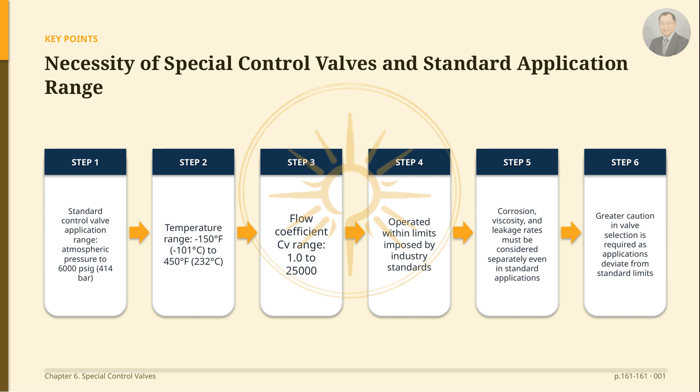However, even within these standard applications, several factors such as fluid corrosion, viscosity, and allowable leakage rates must be considered. And the further an application falls outside these standard limits, the more careful judgment is required in valve selection.

I would like to introduce high-capacity control valves. Generally, globe-style valves larger than 12 inches, ball valves over 24 inches, and high-performance butterfly valves larger than 48 inches fall into the special valve category.

When valve size increases arithmetically, static pressure loads at shutoff increase geometrically. As a result, shaft strength, bearing loads, unbalanced forces, and the required actuator thrust all become more significant as the valve size increases. Therefore, for large valves, the maximum allowable pressure drop is usually reduced to keep design and actuator requirements within reasonable limits.

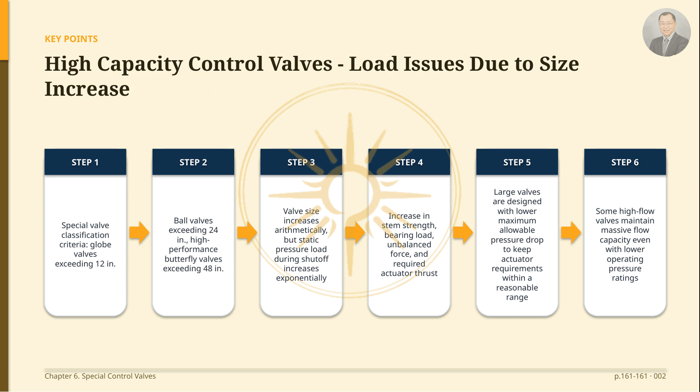However, even with these lowered working pressure ratings, the flow capacity of some large flow valves remains tremendous. In large flow installations, noise levels must be carefully considered because sound pressure levels increase in direct proportion to flow magnitude. To keep valve-originated noise within tolerable limits, large cast or fabricated valve body designs have been developed, as shown in Figure 6.1.

These bodies normally use a cage-style construction, incorporating unusually long plug travel, a great number of small flow openings through the cage wall, and an expanded outlet line connection. This minimizes noise output and reduces fluid velocity.

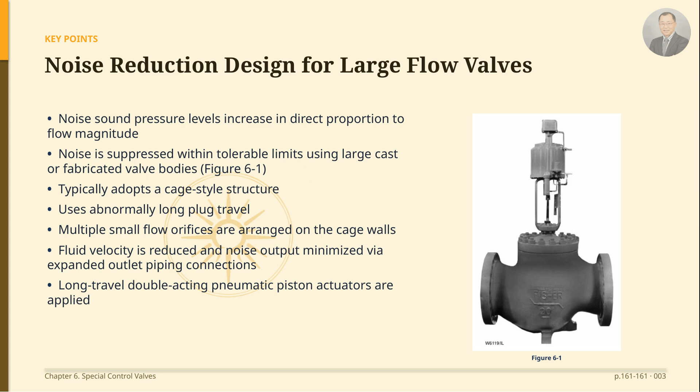Naturally, actuator requirements become more severe, so long-stroke, double-acting pneumatic pistons are typically specified for large flow applications. This shows the appearance and structure of a large flow valve body optimized for noise attenuation service.

The physical size and weight of large valves and actuator components complicate installation and maintenance procedures. Heavy-duty hoists are required to install the valve body assembly into the pipeline, or to remove and replace major trim parts. Additionally, maintenance personnel must closely follow the manufacturer's instruction manuals to minimize the risk of injury.

Next, I will introduce low-flow control valves. There are many applications in laboratories and pilot plants, as well as in general processing industries, where extremely low flow rates must be controlled. These are typically handled in one of two ways.

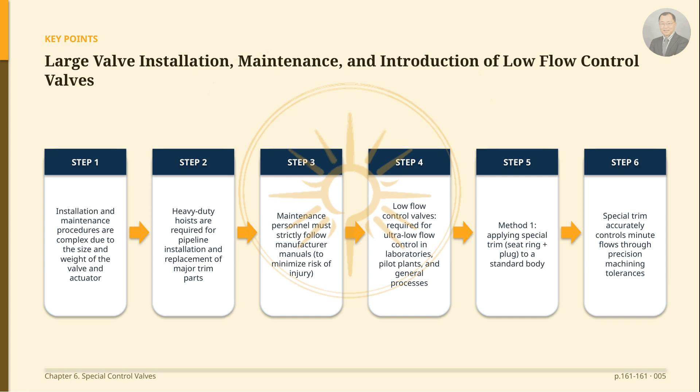The first is applying special trims to standard control valve bodies. These special trims consist of a seat ring and plug designed and machined to very close tolerances to allow accurate control of very small flows. These types of special trim constructions can often handle CV values as low as 0.03.

Using special trims in standard control valves is economical because it reduces the need for spare parts inventory for special valves and actuators. This approach also makes future flow expansions easy, as you only need to replace the trim components within the standard control valve body.

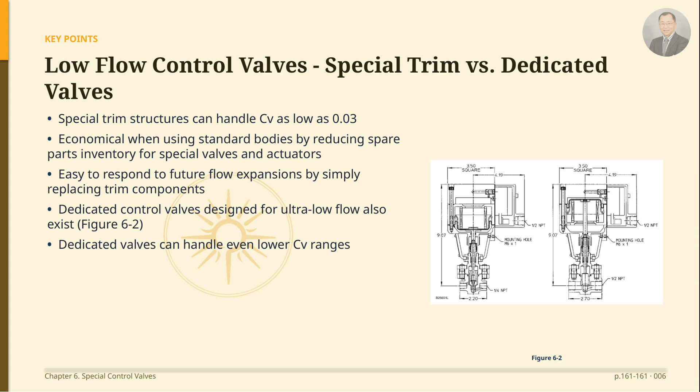Meanwhile, as shown in Figure 6.2, control valves specifically designed for very low flow rates also handle these applications. These dedicated valves can handle even lower CV ranges. This is a special valve designed to enable precise control even within very low flow ranges.

Next, we turn to high-temperature and cryogenic valves. The specialty control valves mentioned earlier handle very low flow rates, down to a CV of 0.000001, or 1 millionth. These specialty control valves are compact and lightweight because they are often used in laboratory environments where very light schedule piping and tubing are used.

These valves are specially designed for the accurate control of very low-flowing liquid or gaseous fluid applications. Next, I will introduce high-temperature control valves.

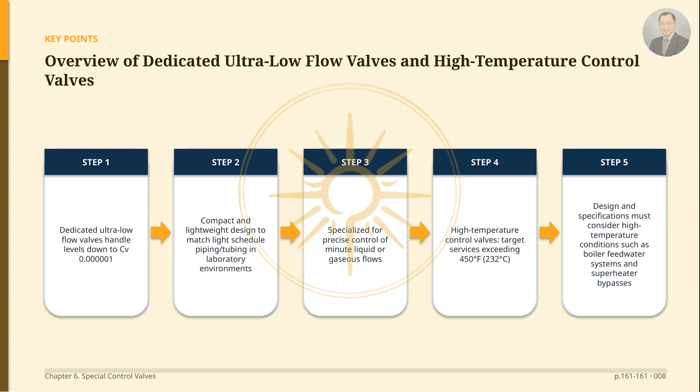Control valves used at temperatures exceeding 450 degrees Fahrenheit (232 degrees Celsius) must be designed and specified with those temperature conditions in mind. In high-temperature environments, such as boiler feedwater systems or superheater bypass systems, standard materials may not be sufficient. I would like to discuss material selection for high-temperature control valves.

For services exceeding 450 degrees Fahrenheit (232 degrees Celsius), the valve must be designed and specified from the start based on the temperature conditions. Typical applications include areas subject to high temperatures, such as boiler feedwater systems and superheater bypass systems. At these temperatures, the materials used in standard control valves are inadequate. Plastics, elastomers, and standard gaskets cannot withstand these conditions and must be replaced with more durable materials.

Metal-to-metal seating is always used for the seat, and semi-metallic or laminated flexible graphite materials are used for packing. For gaskets, a combination of spiral wound stainless steel and flexible graphite is required.

Regarding the valve body material, chrome-moly steel castings are frequently used for temperatures exceeding 1000 degrees Fahrenheit (538 degrees Celsius). ASTM A217 grade WC9 is used up to 1100 degrees Fahrenheit (593 degrees Celsius), and up to 1500 degrees Fahrenheit (816 degrees Celsius), ASTM A351 grade CF8M, or Type 316 stainless steel, is typically selected.

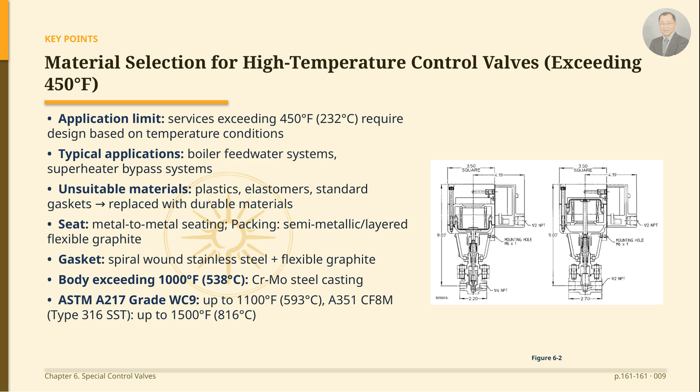I will now cover valve body materials for ultra-high temperatures and move on to cryogenic service. For the range between 1000 degrees Fahrenheit (538 degrees Celsius) and 1500 degrees Fahrenheit (816 degrees Celsius), the carbon content must be managed at the upper end of the range, between 0.04 and 0.08%.

In higher temperature regions, 9% Cr, 1% Mo, and vanadium materials are used. ASTM A217 grade C12A castings and ASTM A182 grade F91 forgings are used at temperatures up to 1200 degrees Fahrenheit (650 degrees Celsius). Extension bonnets protect packing box parts from extremely high temperatures.

Typical trim materials include cobalt-based alloy 6, type 316 with alloy 6 hard-facing, and nitride type 422 stainless steel.

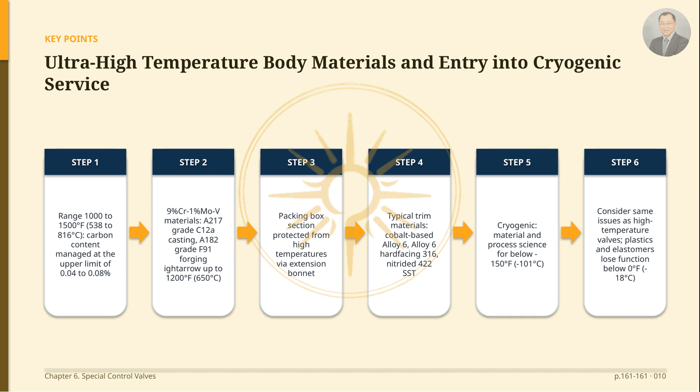Now, let's move on to cryogenic service. Cryogenics is the science dealing with materials and processes at temperatures below minus 150 degrees Fahrenheit (minus 101 degrees Celsius). In cryogenic control valves, issues quite similar to those of high-temperature valves must be considered. Plastic and elastomeric components often cease to function properly at temperatures below 0 degrees Fahrenheit (minus 18 degrees Celsius).

I will now discuss the issues that arise with packing and plug seals in cryogenic regions. In these low-temperature ranges, components such as packing and plug seals require special consideration. In the case of plug seals, standard soft seals become very hard and lose flexibility as the temperature drops. Consequently, they fail to provide the shut-off performance expected from a soft seat. In other words, the sealing effect intended for a soft seat is lost.

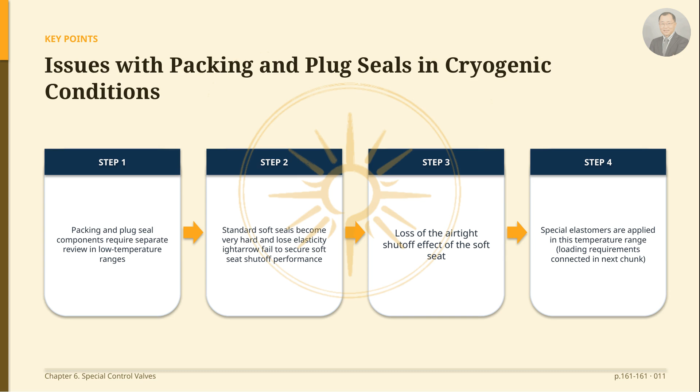To solve this problem, special elastomers have been applied in this temperature range, although separate loading is required to achieve a tight seal. This loading will be covered in the following explanation. I will now explain how to prevent icing using extension bonnets. The special elastomers mentioned earlier require separate loading, or pressurization, to achieve a tight seal.

Packing becomes an issue in cryogenic applications because of the frost that forms on the valves. Moisture from the atmosphere condenses on colder surfaces, and if the surface temperature is below freezing, that moisture freezes into a layer of frost. When this frost and ice form on the bonnet and stem areas of control valves, and the actuator strokes the stem, the frost layer on the stem is drawn into the packing, tearing it and resulting in a loss of seal.

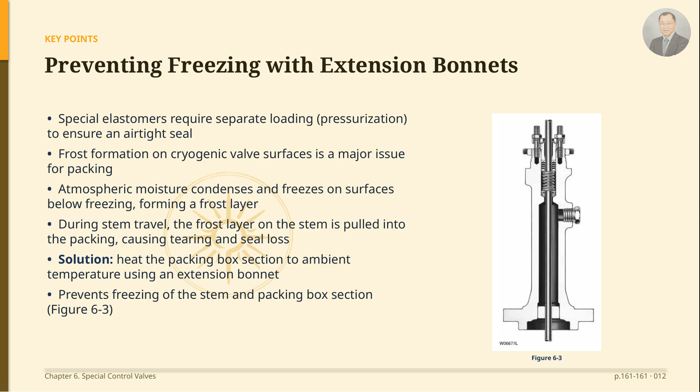The solution is to use extension bonnets. As shown in Figure 6.3, using an extension bonnet keeps the packing box area of the control valve warmed by ambient temperatures, thereby preventing frost from forming on the stem and packing box areas. This is a typical extension bonnet designed for thermal insulation or to secure installation space.

I would like to introduce the determination of extension bonnet length and customized characteristic trims. The length of the extension bonnet is determined by the application temperature and insulation requirements. The colder the application, the longer the extension bonnet required.

For cryogenic applications, the construction materials are generally CF8M for the body and bonnet and 300 series stainless steel for the trim. In flashing applications, hard facing might be required to combat erosion. Next, I will discuss customized characteristic trims.

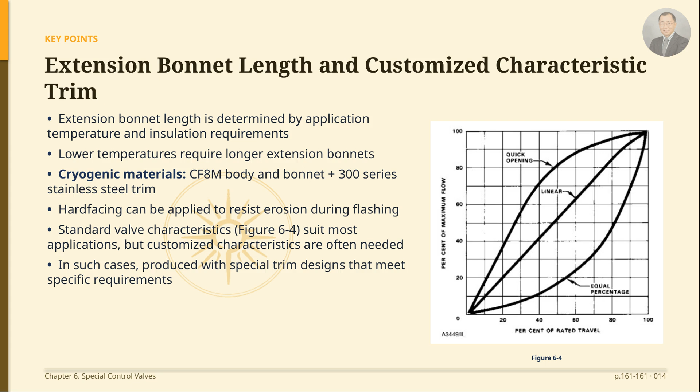The valve characteristics used in standard control valves, as shown in Figure 6.4, meet the requirements of most applications. However, custom characteristics are often needed for specific applications. In these instances, special trim designs can be manufactured to meet these requirements.

Next, we turn to valve characteristics. This is the inherent characteristic graph, which shows the change in flow rate according to the valve travel. I would like to introduce how to implement valve characteristics using contoured plugs and cages, as well as noise abatement.

In the case of contoured plugs, the design of the plug tip can be modified so that the unobstructed flow area changes in size as the plug moves through its travel range. This allows for the generation of a specific flow characteristic.

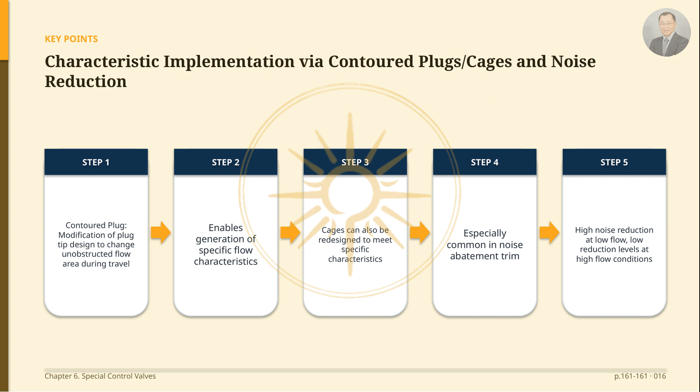Likewise, cages can be redesigned to meet specific characteristics. This is especially common in noise abatement type trims, because in these trims, a high level of noise abatement may be required at low flow rates, but much lower abatement levels are required for higher flow rate conditions.

In the U.S., since 1970, manufacturers and suppliers of nuclear power plant components have been subject to the requirements of Appendix B of 10 CFR Part 50. The official name of this regulation is Quality Assurance Criteria for Nuclear Power Plants and Fuel Reprocessing Plants. The agency that enforces this regulation is the U.S. Nuclear Regulatory Commission, or NRC.

An important point here is that the ultimate responsibility for proving compliance with Appendix B rests with the plant owner. Since the owner cannot manufacture everything themselves, they rely on documented evidence provided by various component manufacturers. This evidence must show that the components were manufactured, inspected, and tested by proven techniques, performed by qualified personnel according to documented procedures.

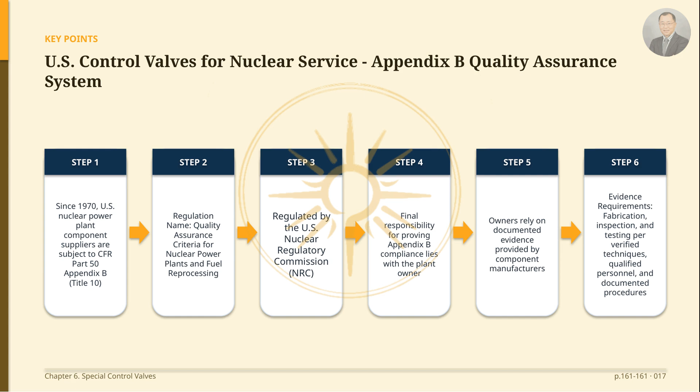The medium that translates the federal regulation requirements mentioned earlier into actual valve specifications is the ASME Boiler and Pressure Vessel Code. Most nuclear power plant components are specified in accordance with Section 3 of this code, titled Nuclear Power Plant Components. Section 3 is applied to align with the requirements of the Code of Federal Regulations.

All aspects of the manufacturing process must be documented in a quality control manual, and ASME must audit and certify this manual before the actual manufacture of the components. All subsequent manufacturing materials and operations are checked by an authorized inspector.

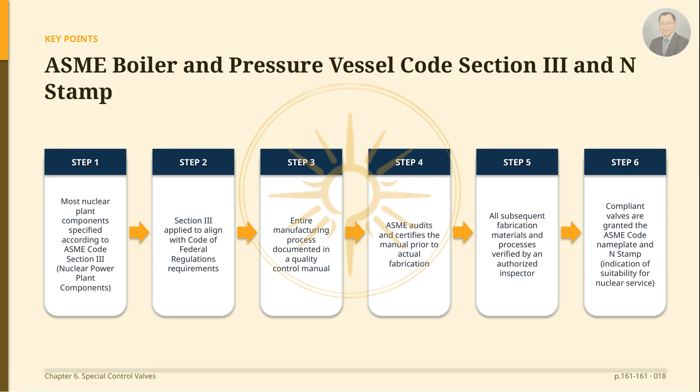All valves manufactured in accordance with Section 3 requirements receive an ASME code nameplate and an N stamp, which is the symbol of acceptability for service in nuclear power plant applications. In practice, it is very important to distinguish what Section 3 covers and what it does not.

First, the scope of non-application. It does not apply to parts not associated with the pressure retaining function, nor to actuators and accessories unless they are pressure retaining parts. It also does not apply to the deterioration of valve components due to radiation, corrosion, erosion, seismic or environmental qualifications, or to cleaning, painting, or packaging requirements.

However, these excluded items are usually specified separately in customer specifications. Conversely, the scope of application includes materials used for pressure-retaining parts, design criteria, fabrication procedures, non-destructive test procedures for pressure-retaining parts, hydrostatic testing, and marking and stamping procedures.

Finally, Section 3 is revised by semi-annual addenda, which may be used after the date of issue and become mandatory 6 months after the date of issue.

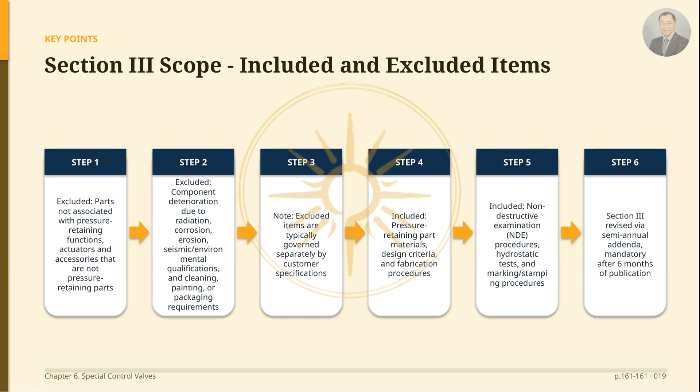Next, we turn to SSC and NACE standards. Now, I would like to introduce sulfide stress cracking, which is a problem in harsh environments containing hydrogen sulfide, so-called sour service. NACE International is a technical society concerned with corrosion and corrosion-related issues.

NACE manages many standards, but by far the most influential and well-known is MR0175. The former name of this standard was Sulfide Stress Cracking Resistant Metallic Materials for Oilfield Equipment. MR0175 was issued in 1975 to provide guidelines for the selection of materials that are resistant to failure in hydrogen sulfide-containing oil and gas production environments.

Because this standard has been so widely referenced, the term NACE has become nearly synonymous with MR0175 throughout the process industry.

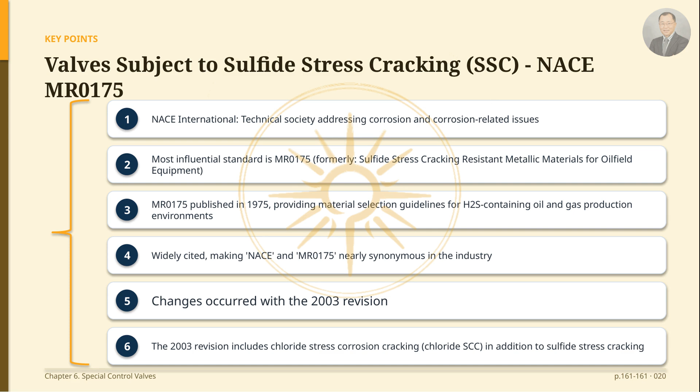However, the situation changed in 2003. In the 2003 revision, the standard was significantly modified to cover chloride stress corrosion cracking in addition to sulfide stress cracking. As a result, the standard system split into two branches. First, in late 2003, MR0175 was reformatted and released as a joint NACE/ISO document.

This integrated document is NACE MR0175/ISO 15156, and it covers materials for use in H2S containing environments in oil and gas production within the petroleum and natural gas industries. Meanwhile, in April 2003, NACE also released a separate new standard, MR0103. The title of this standard is Materials Resistant to Sulfide Stress Cracking in Corrosive Petroleum Refining Environments.

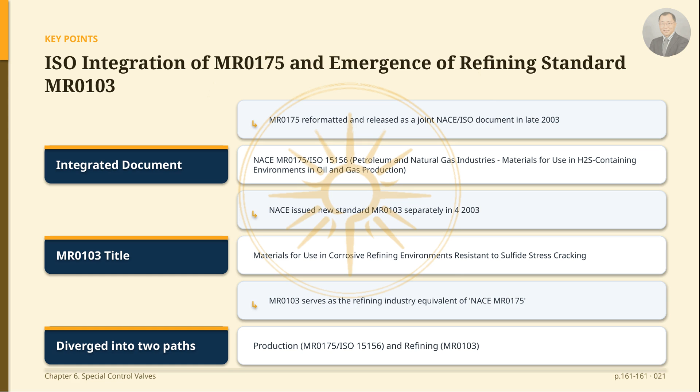Simply put, you can think of MR0103 as the NACE MR0175 for the refining industry. Thus, the standards diverged into two streams: MR0175/ISO 15156 for the production sector, and MR0103 for the refining sector. I would like to introduce the nature of MR0103, the refining standard, and the extent to which these standards are legally mandated.

MR0103 only addresses sulfide stress cracking, and in that respect, it is similar in many ways to the pre-2003 revisions of MR0175. The application of MR0103 in the refining industry is steadily increasing.

Here, it is necessary to distinguish the level of mandate. In some states and regions in the USA, compliance with certain revisions of NACE MR0175 or MR0175/ISO 15156 is mandated by statute. On the other hand, at this time, MR0103 is not legally mandated by any governing bodies. Finally, the following explanation is based on the content and requirements of the pre-2003 MR0175, but it cannot be presented in as much detail as the actual standard, nor does it guarantee the suitability of specific materials.

Therefore, I strongly recommend referring to the actual standard text before selecting control valves for sour service.

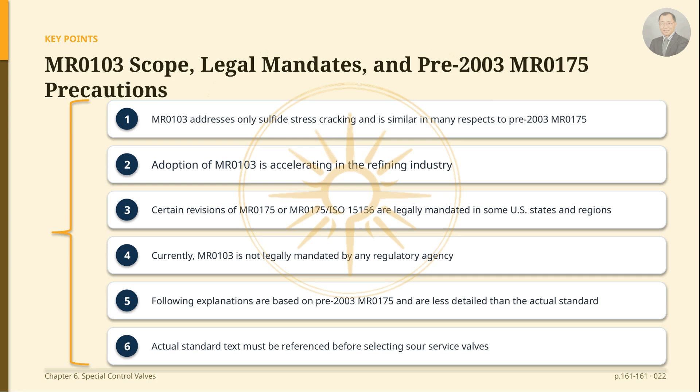I will now explain how to select metallic materials that resist sulfide stress cracking, or SSC. Most ferrous metals become susceptible to sulfide stress cracking when hardened by heat treatment or cold work. Conversely, many ferrous metals can actually improve their resistance through proper heat treatment. Carbon and low-alloy steels must be properly heat-treated, and a maximum hardness limit of 22 HRC applies.

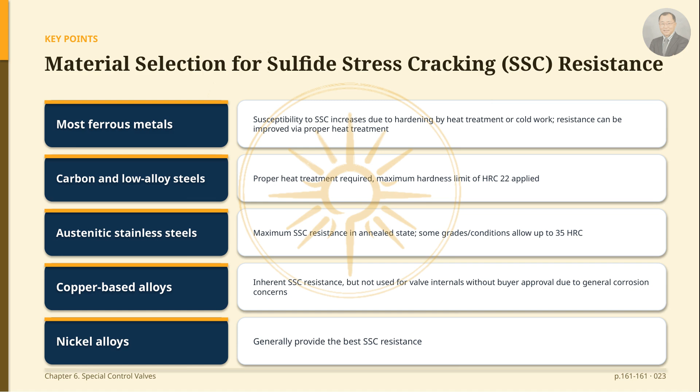Austenitic stainless steels have the best resistance in annealed condition, and in some specific grades and conditions, up to 35 HRC is acceptable. Copper-based alloys are inherently resistant, but due to concerns about general corrosion, they are generally not used in critical parts of a valve without the purchaser's approval. Nickel alloys generally provide the best resistance to sulfide stress cracking.

Next, I will introduce the sulfide stress cracking requirements regarding nickel alloys, plating, welding, and identification marking. Some precipitation hardenable nickel alloys can be used up to 40 HRC in applications requiring high strength or hardness. Plating such as chromium or nickel does not protect against sulfide stress cracking. Therefore, while its use is allowed in sour applications for wear resistance, it cannot be used to protect a non-resistant base material from SSC.

Weld repairs and fabrication welds on carbon and low-alloy steels must be properly processed to ensure that the base metal, the heat-affected zone (HAZ), and the weld deposit all meet the maximum hardness requirement of 22 HRC or less. Post-weld heat treatment, or PWHT, is mandatory for alloy steels and is generally applied to carbon steels as well. For identification marking, conventional stamping is permissible in low-stress areas,

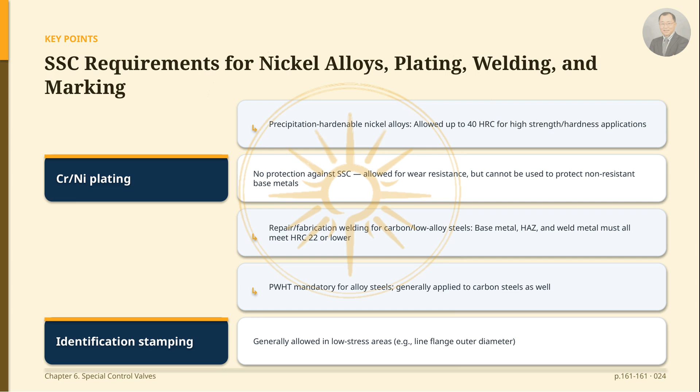such as on the outside diameter of line flanges. I previously mentioned low-stress areas like the outer diameter of line flanges, but in other areas, low-stress identification stamping must be used. The standard precludes using ASTM A193 grade B7 bolting for applications that are considered exposed.

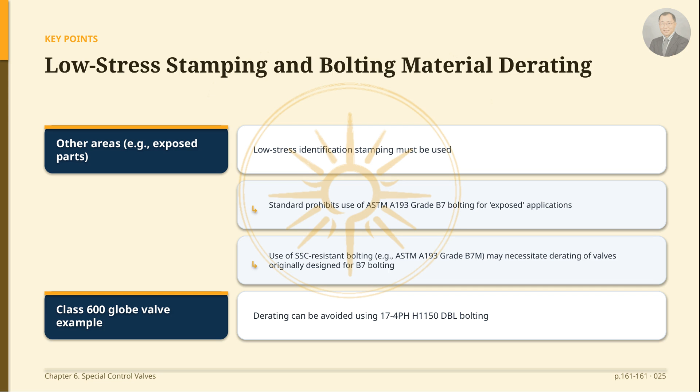Therefore, SSC-resistant bolting materials, such as ASTM A193 grade B7M, are used, but in this case, valves originally designed for B7 bolting may require derating. For example, in a Class 600 globe valve, 17-4PH H1150 DBL bolting can be used to avoid derating.

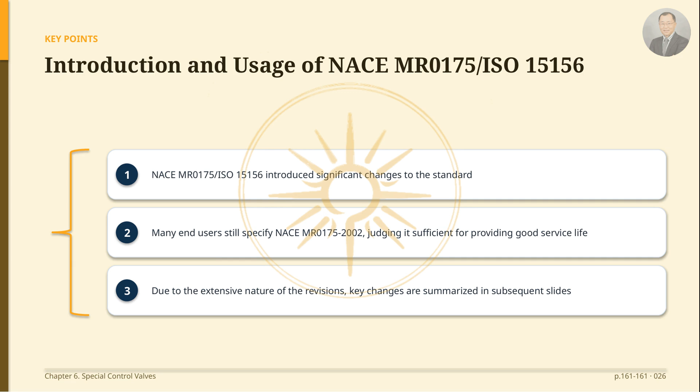Now, I would like to introduce the introduction and current usage of the NACE MR0175/ISO 15156 standard. This integrated standard brought significant changes to the previous standard. However, many end users continue to specify NACE MR0175-2002, as they feel this version is sufficient to provide a good service life. I will summarize the most significant changes of the new integrated standard in the following sections.

I'll introduce the major changes in MR0175/ISO 15156. First, 17-4PH H1150 DBL bolting, which was previously used for full-rated exposed bolting in a Class 600 globe valve, is no longer allowed.

Second, this revision addresses both sulfide stress cracking and chloride stress corrosion. Prior versions simply listed most materials as acceptable or unacceptable. However, as the scope expanded to cover chloride stress corrosion, the new standard changed to allow all corrosion-resistant alloys within certain limits, referred to as environmental limits or environmental restrictions.

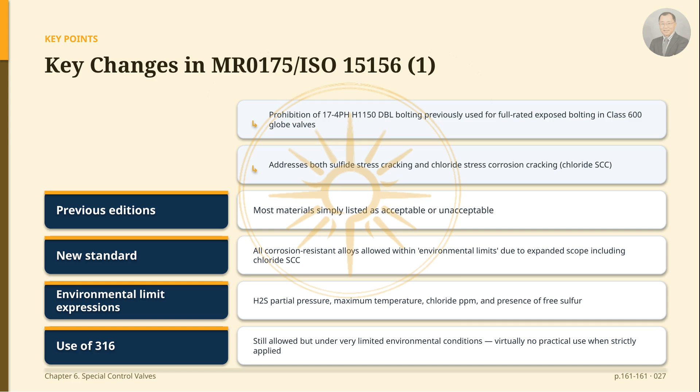These environmental limits are typically expressed in terms of H2S partial pressure, maximum temperature, ppm chlorides, and the presence of free sulfur. Third, the use of 316 material is still allowed, but only under very limited environmental conditions. If strictly followed, this material will find very little use in practice.

Next, I'll discuss the scope of application and the division of responsibility for NACE MR0175 and ISO 15156. This standard applies to petroleum production, drilling, gathering, and flow line equipment, as well as field processing facilities, and is limited to H2S bearing hydrocarbon service. Importantly, it does not apply to refineries, as the refinery environment is covered by a separate standard.

MR0103. The division of responsibility is also clear. The buyer is responsible for specifying the correct materials, and the manufacturer is responsible for ensuring the specified materials meet the metallurgical requirements of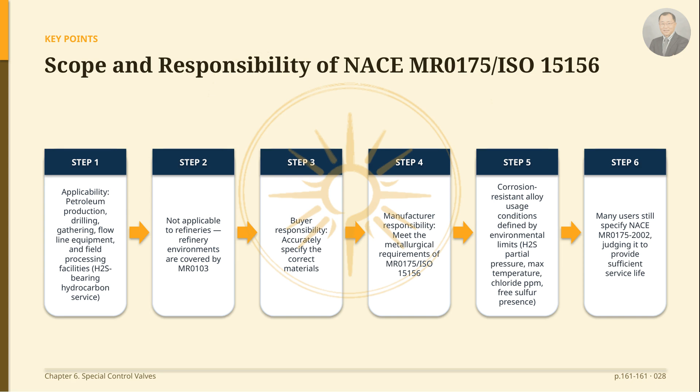MR0175 and ISO 15156. This revision defines the usage conditions for corrosion-resistant alloys through environmental limits, such as H2S partial pressure, maximum temperature, ppm chlorides, and the presence of free sulfur. Meanwhile, many end users still specify the 2002 edition of MR0175, believing that version alone is enough to ensure sufficient service life.

Following this, I'll introduce NACE MR0103, the sulfide stress cracking standard for the refining industry. This standard is similar in many respects to the MR0175 revisions prior to 2003, but there are a few important differences. First, the definition of what constitutes a sour environment, that is, a corrosive environment, is different, as MR0103 uses a refinery-based definition. Also, the responsibility for determining and imposing when the requirements of this standard apply lies with the user. The biggest difference is the scope.

While the 2002 and earlier revisions of MR0175 placed environmental restrictions on some materials, MR0103 deals only with sulfide stress cracking and does not impose environmental limits on any materials. Therefore, materials are categorized as either acceptable or not.

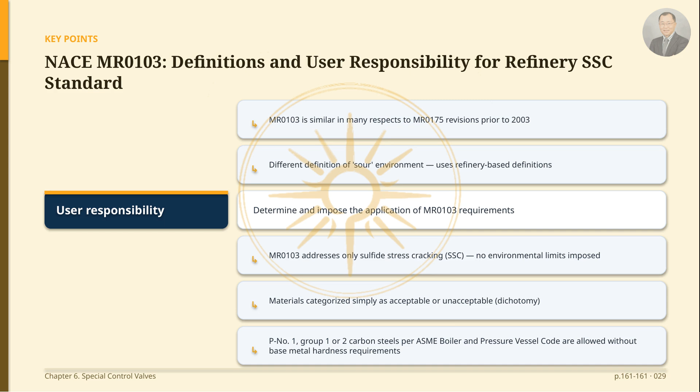Finally, carbon steel-based materials classified as P-No. 1, Group 1 or Group 2 in the ASME boiler and pressure vessel code are acceptable per MR0103 without base metal hardness requirements. Now, I'll introduce the range of carbon steel-based materials to which the NACE

MR0103 standard applies. Carbon steels classified as P-No. 1, Group 1 and 2 in the ASME boiler and pressure vessel code are recognized as satisfying MR0103 without separate base metal hardness requirements. Specifically, P-No. 1, Group 1 and 2 include WCC and LCC castings, A105 forgings, A516 grade 70 plate, and other common carbon steel pressure vessel materials. These materials are representative carbon steels commonly used in refinery environments.

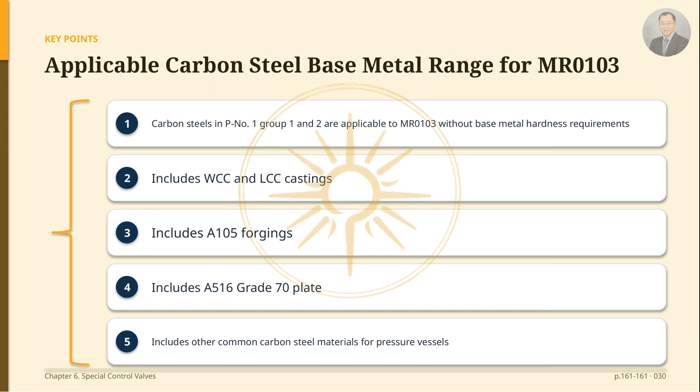Next, I would like to introduce the welding control requirements that MR0103 imposes on carbon steels. MR0103 requires more rigorous welding controls for carbon steels than those in the 2002 edition of MR0175. Specifically, it stipulates that P-No. 1 carbon steels must be welded according to another NACE document called

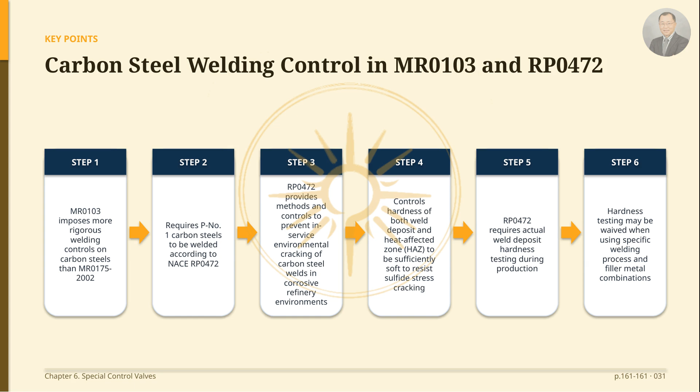RP0472. This RP0472 document contains methods and controls to prevent in-service environmental cracking of carbon steel weldments in corrosive petroleum refining environments. This regulation ensures that both the weld deposit and the heat-affected zone, or HAZ, are soft enough to resist sulfide stress cracking. Additionally, RP0472 requires actual hardness testing of weld deposits during production, although this hardness testing may be waived if certain welding process and filler material combinations are employed.

Now, I will explain how the hardness of the weld heat-affected zone is controlled in the NACE MR0103 standard. The hardness of the heat-affected zone, or HAZ, around the weld can be managed in 2 primary ways. The first is by applying post-weld heat treatment, known as PWHT, and the second is by restricting the chemistry of the base material itself. A representative example of restricting chemical composition is imposing a maximum carbon equivalent, or CE value, below a certain level. The reason for controlling hardness in this way is to prevent stress cracking occurring in corrosion environments.

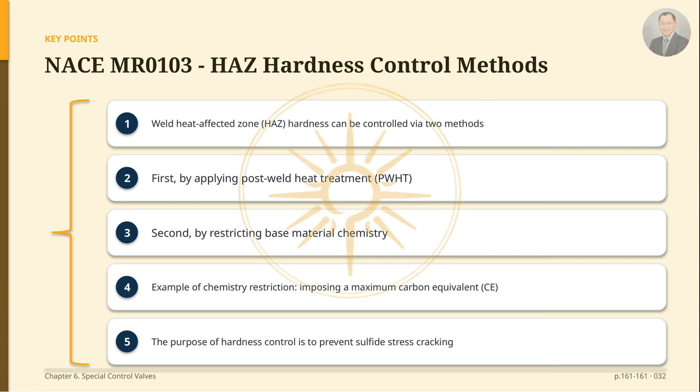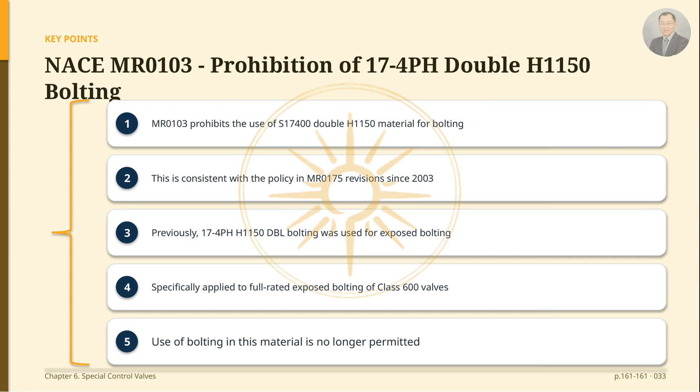Next, I will discuss the restrictions regarding bolting materials. The MR0103 standard does not allow the use of S17400 double H1150 material for bolting. This is the same policy as the MR0175 standard revised after 2003. In the past, 17-4PH H1150 DBL bolting was widely used for full-rated exposed bolting in Class 600 valves. However, please note that due to this specification change, bolting of this material is no longer permitted.